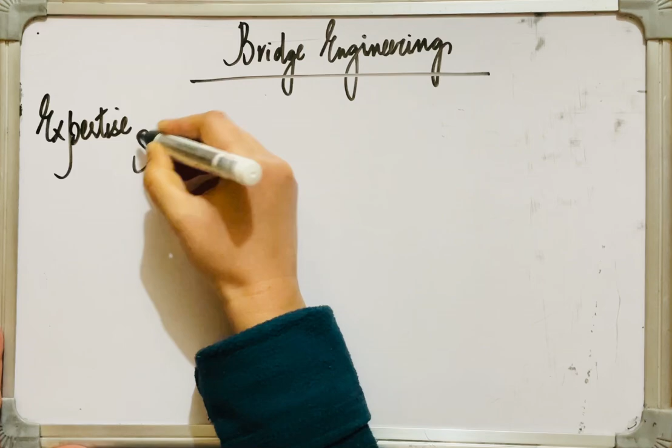From surveying to statistics, from runoff calculations to rubble masonry, from steel to structural concrete, and from materials to modern methods of construction.

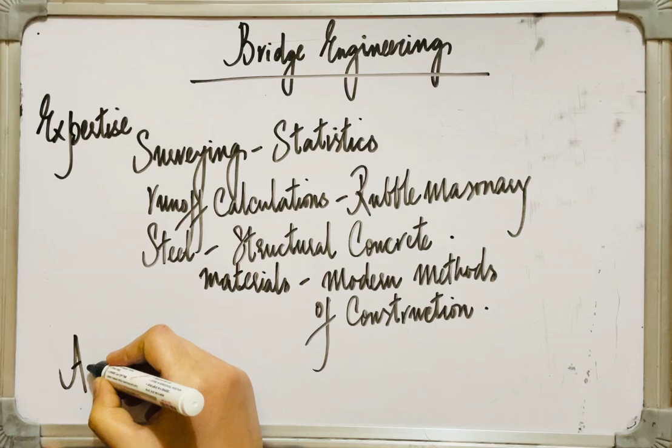A successful bridge engineer has to have an appreciation of both aesthetics and economics, besides ability in analysis and dexterity in design. Such is the wonderful and fascinating field of bridge engineering.

Before moving any further, let's study about the definition of a bridge. Let me rub it first. Definition of a bridge. What is a bridge?

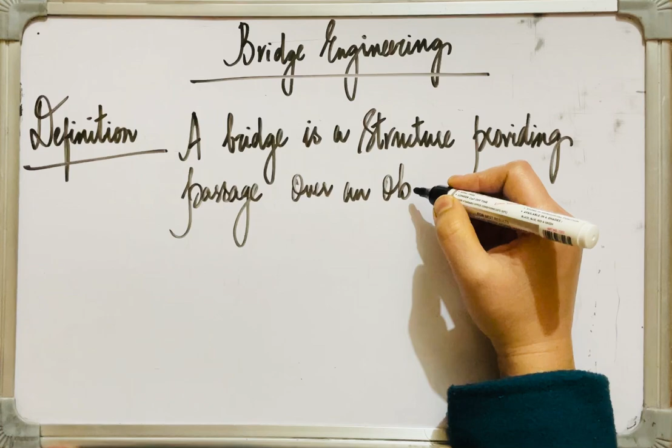A bridge is a structure providing passage over an obstacle without closing the way beneath. So a bridge is a structure which provides passage over an obstacle, but without closing the way beneath.

A bridge is a structure providing passage over an obstacle without closing the way beneath. This required passage may be for a road, for a railway, or pedestrians, or a canal, or even for a pipeline, etc. And the obstacle which needs to be crossed over may be a river, even a road, a railway, or a valley.

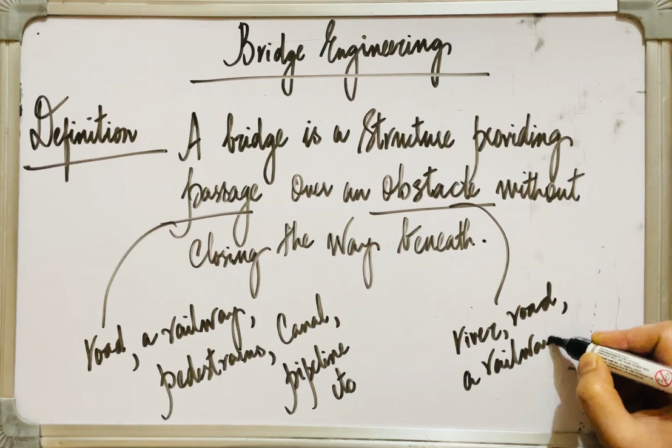So a bridge is a structure providing passage over an obstacle without closing the way beneath. This passage may be required for a road, a railway, a pedestrian, a canal, or a pipeline. And the obstacle that needs to be crossed may be a river, even a road, a railway, or a valley. Bridges are remarkable feats of engineering, composed of several parts that work in harmony to provide vital connections across obstacles such as rivers, valleys, or even roadways.

These structures are essential for transportation and infrastructure, and they consist of various components, each playing a unique role in ensuring the bridge's stability, load bearing capacity, and functionality.

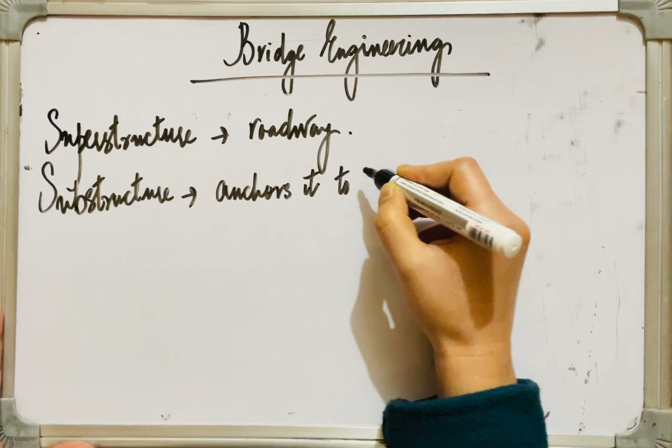Let me rub it first. From the superstructure of a bridge that supports the roadway, to the substructure of a bridge that anchors it to the ground, or the foundation of that particular bridge that transmits load to the bearing strata.

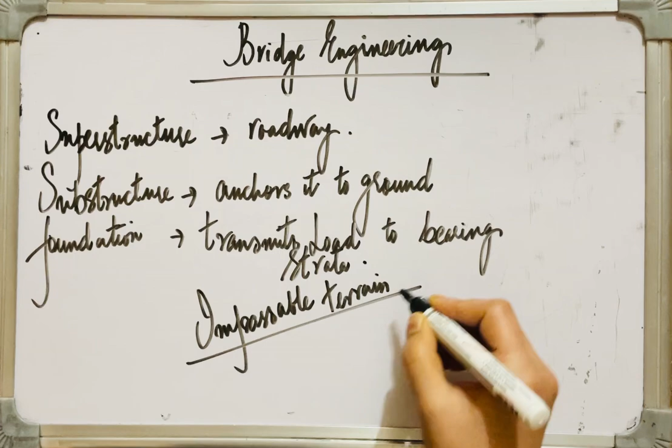Different parts of a bridge collectively form an intricate system that allows people and vehicles to traverse otherwise impassable terrains. And this bridge serves as a vital link, providing passage over rivers, valleys, or other impediments, allowing the smooth flow of people or vehicles from one side to the other.

So this was about the definition of bridge and importance of bridge. Before moving any further and studying about components of a bridge, we have to study one very important thing, that is span of a bridge. Let me rub it first.

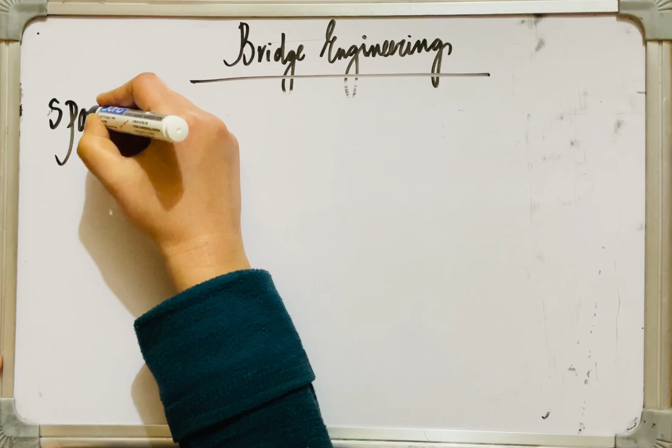Span of a bridge. In the field of bridge engineering, one of the most fundamental terms is this, span. Because the span of a bridge is a most fundamental term and it plays a crucial role in design, engineering, and overall performance of a bridge.

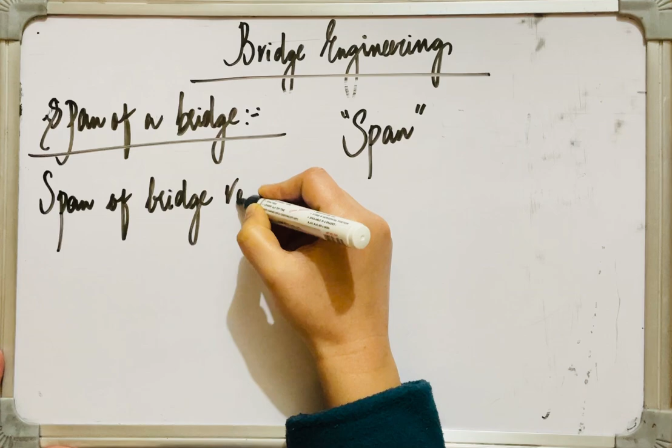What is the span? The span of a bridge refers to the distance between two supporting structures, such as piers and abutments, that hold up the bridge deck.

As already discussed, this span plays a crucial role in the design, engineering, and overall performance of a bridge. Understanding the span definition in bridge construction is essential for engineers, architects, and construction professionals, as it influences not only the bridge's structure but its functionality, cost, and durability as well.

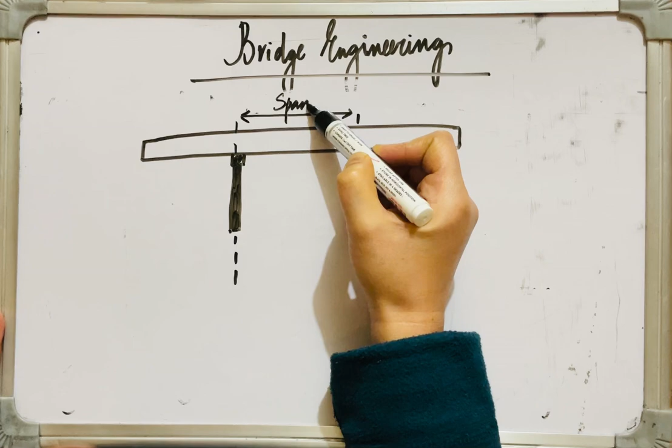Let me rub it first and draw a diagram to illustrate the concept of span in a bridge. If this is the bridge deck, and this is one pier, and this is the other pier, then the center to center distance is known as the span in a bridge.

Since this is the end, here will be the abutment, so this will be the end span, and this is also one of the end spans. The total distance, this span plus both of the end spans, is the length of the bridge, the total length of the bridge.

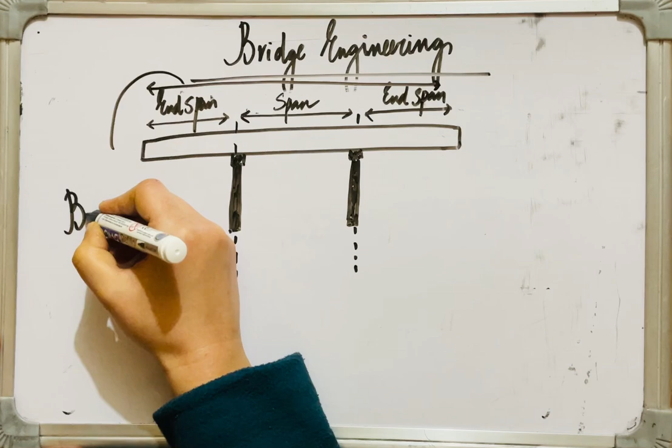To illustrate it in simple terms, the span of a bridge is a measurement of the distance between two supports that bear the load of the bridge, because these piers bear the load of the decking. The span is typically measured from the center of one support to the center of the next support, that is, the center to center distance between two adjacent piers or abutments. This differs for various bridges.

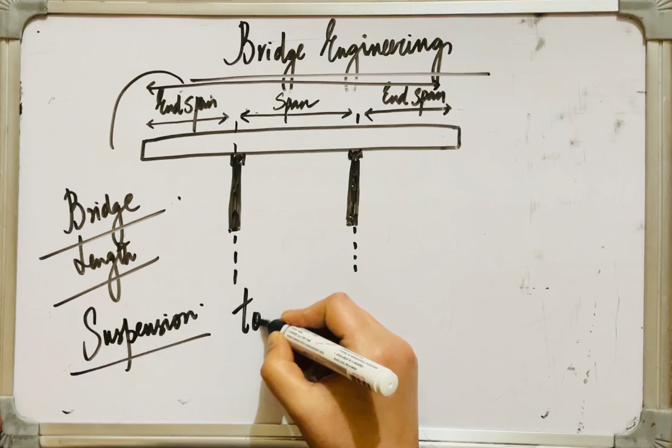For instance, if I take the case of a suspension bridge, the span is typically measured from the center of one support to the center of the next, but it depends on the type of bridge and varies from one to another. In a suspension bridge, the span is measured between two adjacent towers that hold up the cables.

In case of a beam bridge, the span is the distance between two piers that I already showed here. It's the distance between two piers or supports beneath that hold up the bridge deck. This is the deck of the bridge.

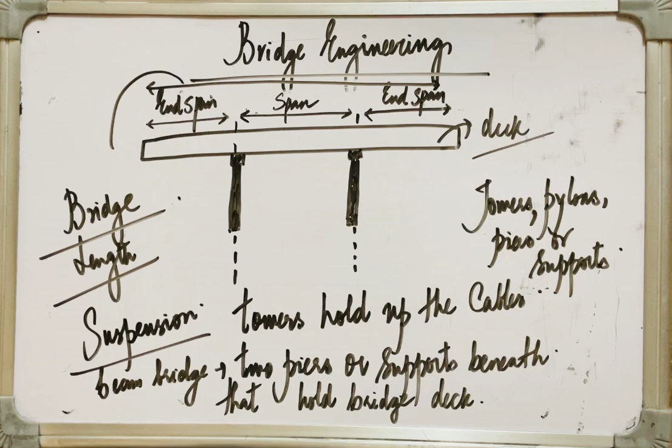Summarizing it further, in the simplest terms, span is the center to center distance between two adjacent towers or pylons, or piers or supports of a bridge, depending upon the type of bridge. That distance is known as the span of a bridge. So this was about the span, which is the most fundamental term used in bridge engineering.

Moving on, let's study the components of a bridge.

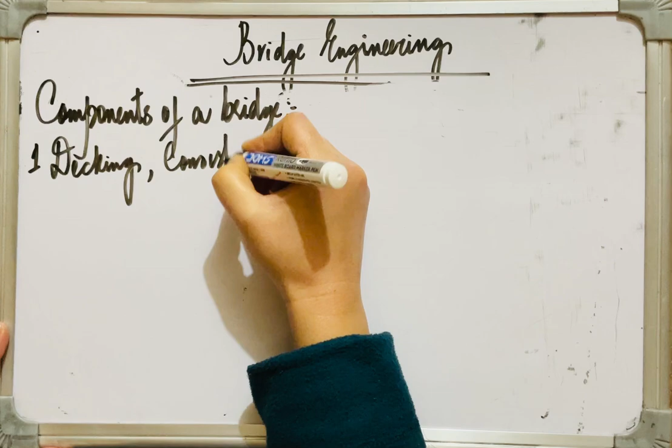The main components of a bridge are: first, decking, which consists of deck slab, girders, trusses, etc. Then we have bearings for the decking.

Then we have abutments and piers. Then foundation for the abutments and piers. Then river training works.

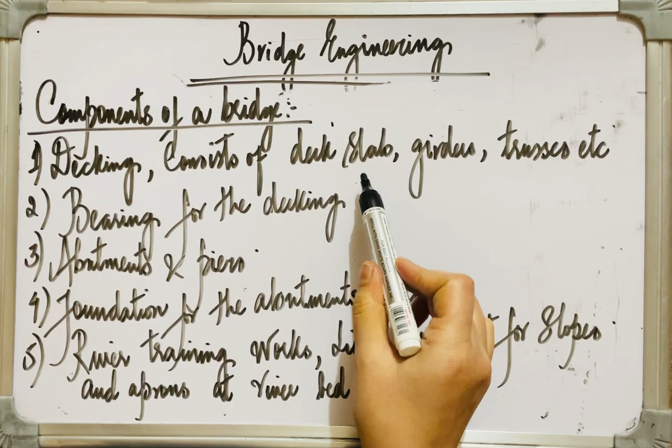Like revetment for slopes, and aprons at riverbed level, etc. There are more, but let me drop those for now. So the components of a bridge are: decking, which consists of a deck slab, girders, trusses, etc.; bearings for the decking; abutments and piers; foundations for the abutments and piers; and river training works like revetment for slopes and aprons at the bed level, etc.

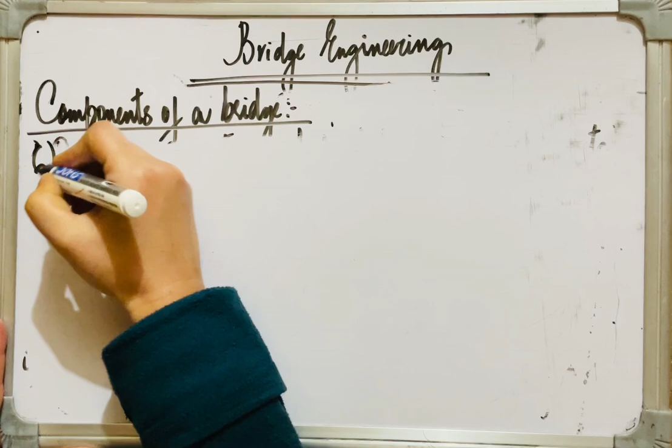We have more, let me drop it for now. And we have approaches to the bridge to connect it to the roads on either side. So number 6 is approaches to the bridge, and their function is to connect it to the road on both sides. Then we have handrails, parapets, guard stones, etc.

So these are the various components of a bridge. Let me repeat it again: decking, which consists of deck slab, girders, trusses, etc.; bearings for the decking; abutments and piers; foundation for the abutments and piers; river training works like revetment for slopes and aprons at the riverbed level; approaches to the bridge to connect it to the roads on either side; and handrails, parapets, and guard stones, etc.

So broadly speaking, there are 3 main components of a bridge. First is the superstructure, second is the foundation, and third is the substructure.

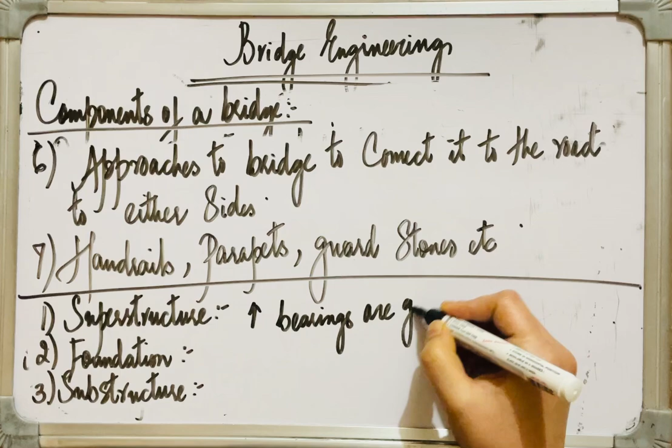Superstructure: the components above the level of bearings are grouped as superstructure. Foundation: the portion below the bed level of the river is known as foundation. Substructure: all those components which are below the level of bearing but above the level of foundation are known as substructure.

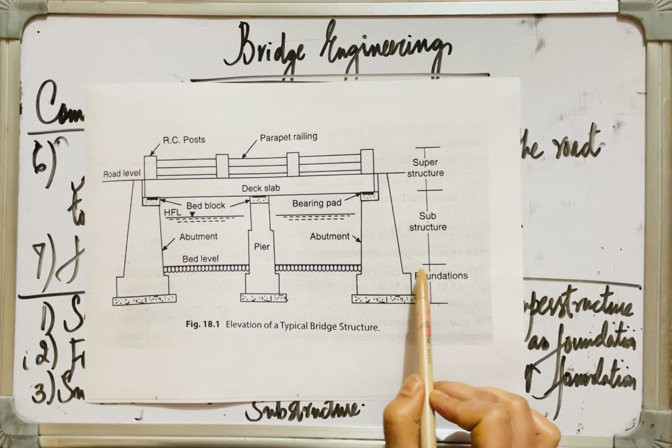We have many components of a bridge as told: decking, this is the decking; then we have bearings, these are the bearings; then abutments and piers, this is the abutment, the end supports and intermediate supports are known as piers. Then I have the foundation, below the bed level of the river over which we are building the bridge. Then the river training works, here, pitching for the embankment slopes and aprons, etc. Then handrails, parapet, etc., also shown.

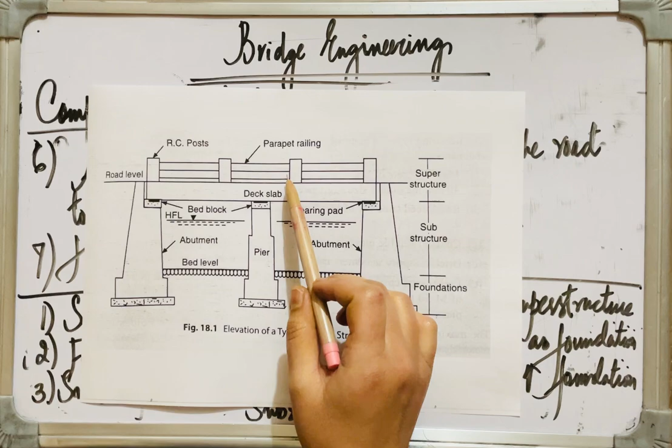Broadly, I categorize the components of a bridge in three parts: the superstructure, the foundation, and the substructure. All those components which are above the level of the bearings are grouped as superstructure. The foundation is below the bed level of the river, and all that portion which is below the bed level forms the foundation. All those components which are below the level of the bearing but above the level of the bed level of the river form the substructure. So this is foundation, this is substructure, and this is superstructure. In superstructure, we have decking, handrails, parapets, curb, approach slabs, etc.

Then we have bearings in substructure. We have bearings, abutments, piers, and below the bed level of the river, we have the foundation. So this is the typical elevation of a bridge structure, and these are the components of a bridge. Now let's study them in detail.

There are essentially three main components of a bridge: superstructure, foundation, and substructure. All those components which lie above the level of bearings are known as superstructure. That portion of the bridge which lies below the bed level of the river is known as foundation. And those components which fall below the level of bearings but above the level of foundation are grouped as substructure. Now let's study about them in some detail.

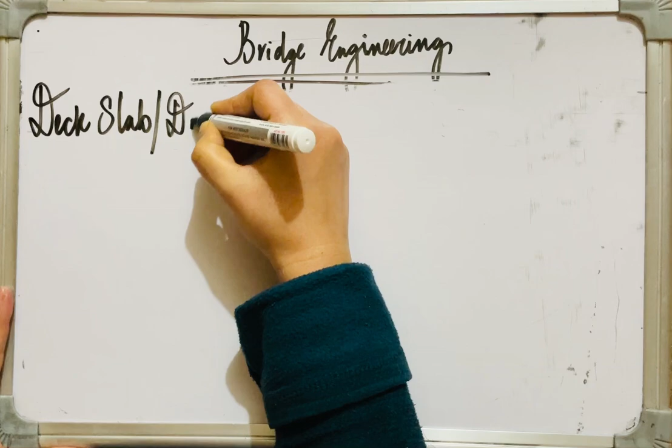First, we'll study about the deck slab or deck. In the figure, you can see this is the deck slab. This is the deck slab, right? In this figure also I'll show you, this is the deck slab. All right, this portion is the deck slab. What is deck slab?

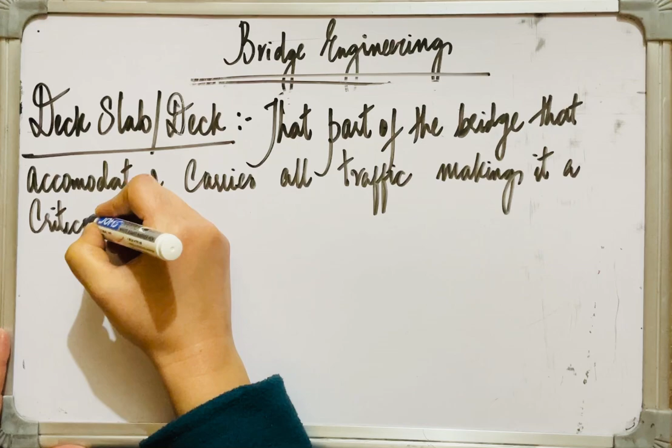Deck is that part of the bridge that accommodates and carries all traffic, making it a critical component for the safe passage of vehicles and pedestrians, be it vehicular traffic or pedestrian traffic. So the deck slab or the deck is that part of the bridge which accommodates and carries all that traffic, making it a critical component for the safe passage of vehicles and pedestrians.

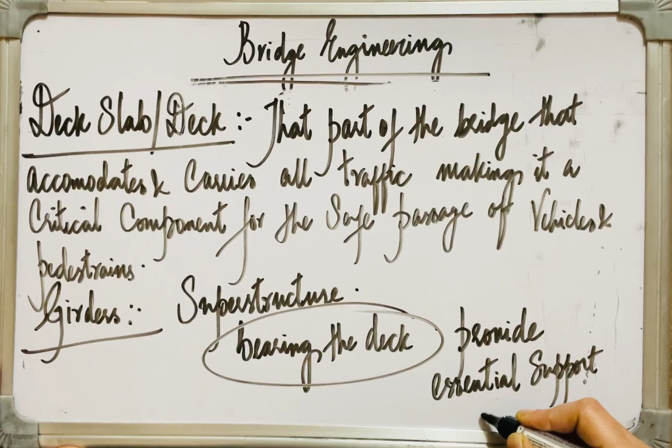Then let's study about girders or beams. Girder or beams are integral parts of the superstructure and are responsible for bearing the deck, bearing all the load that comes on the deck. And these structural elements bend along the span and provide essential support for the deck.

Moving on, let's study about bearings. What are bearings in a bridge? Bearings are provided in bridges to transmit the load from superstructure to substructure in such a manner that the bearing stresses induced in the substructure are within permissible limits.

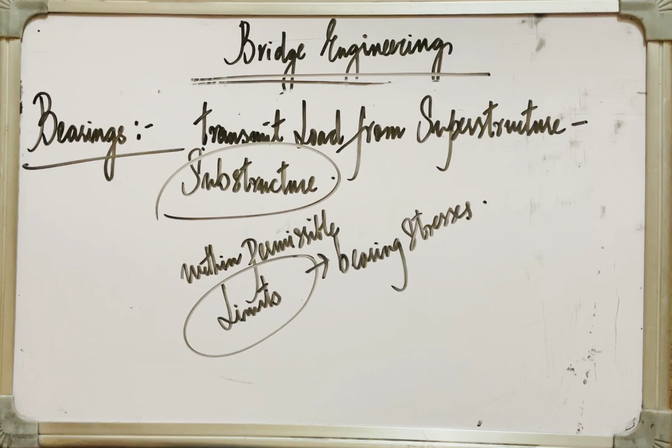Bearing stresses, all right. Bearings are provided in bridges to transmit load from superstructure to substructure, but in such a manner that the bearing stresses induced in the substructure are within permissible limits. And these bearings should also accommodate certain relative movements between the superstructure and the substructure.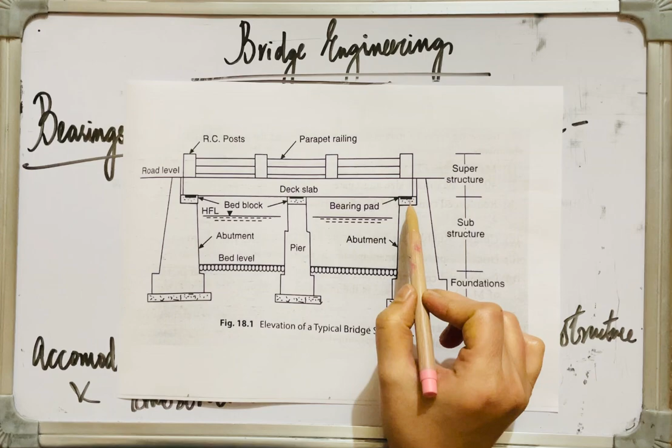And these bearings are provided at the top of the piers and the abutments. I will show you in the diagram. They are provided at the top of the abutments or the piers. This is the bearing pad, this is the bearing pad, and this is the bearing pad. In this diagram you can also see this is the bearing, this is the bearing, and these are provided at the top of abutments and piers.

They are provided at the top of piers and abutments.

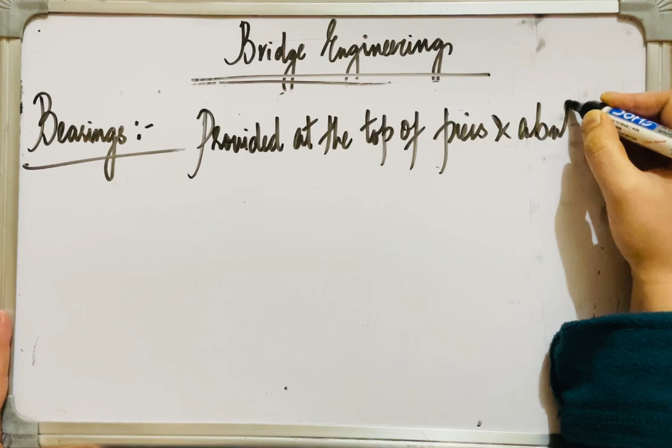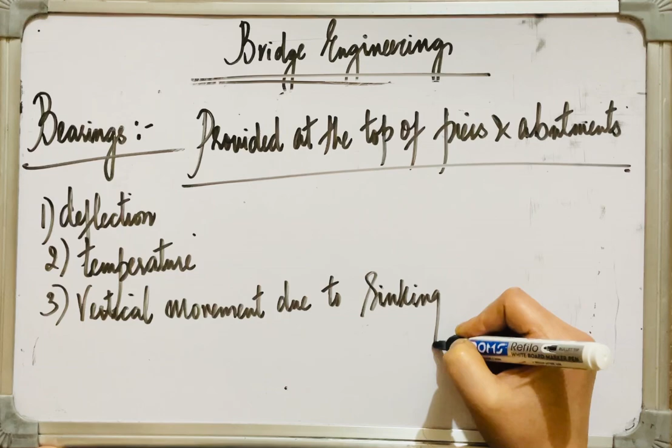Thus, the components which are provided over the supports of a bridge to accommodate the changes in the main girders - that changes may be due to deflection, they may be due to temperature, or vertical movement due to sinking of the supports, or shrinkage, or pre-stressing, or maybe creep, etc.

and to transmit the load from the superstructure to substructure in such a manner that the bearing stresses induced in the substructure are within permissible limits are known as bearings, and they typically provide a resting surface between bridge piers and the bridge deck, as you can see in the figure. These bearings are providing a resting surface between the bridge piers and the bridge deck.

Here you can also see these are the bearings, and they are providing a resting surface between the bridge deck and the bridge piers or abutments. As already discussed, they are there to transmit the load from the superstructure to substructure in such a manner that the bearing stresses induced in the substructure are within the permissible limits, and besides that they have to also accommodate certain relative movements between the superstructure and substructure.

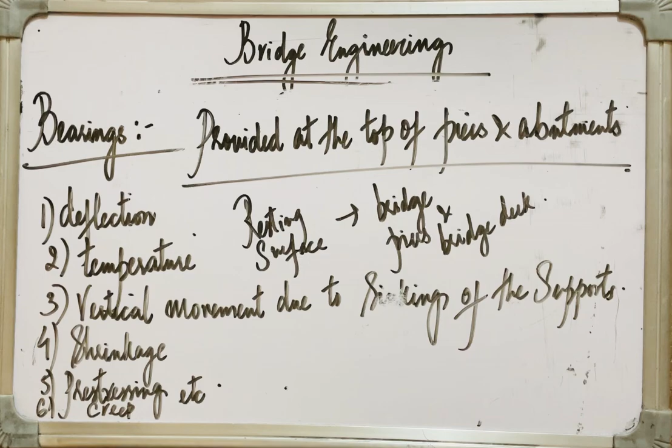These changes or relative movements in main girders of the decking may be due to deflection, temperature, vertical movements due to sinking of the supports, or shrinkage, pre-stressing, creep, etc. As already discussed, they provide the resting surface between the bridge piers and the bridge deck and are always provided at the top of piers and abutments. We have two types of bearings. Let us study about that as well.

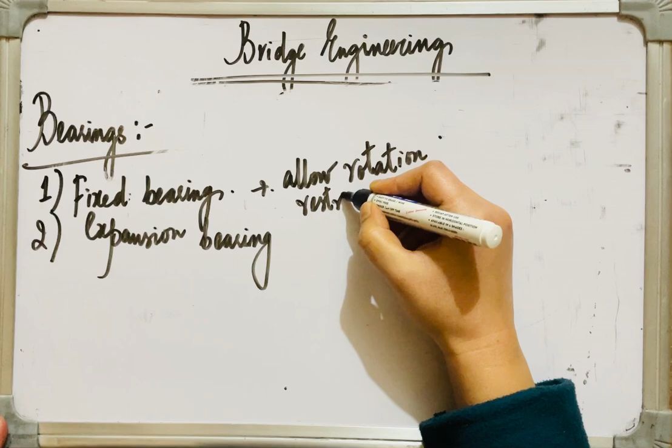We have two types of bearings, fixed bearing and expansion bearing. Fixed bearings allow rotation, but they restrict translation, thus preventing expansion.

They prevent expansion, but they allow rotation, whereas expansion bearings allow both rotation and longitudinal translation - that is, they allow both horizontal movements and rotations. So this was about the types of bearing, fixed bearings and expansion bearings. Fixed bearings allow rotation but restrict translation, hence they prevent expansion, whereas expansion bearings allow both rotation and longitudinal translation, that is, both horizontal movements and rotations.

Bearings form an important part of the bridge and are included among the most highly stressed elements in a bridge. They call for care in design, skill in execution, and regular maintenance. Faulty design or malfunctioning of the bearings have often contributed to the collapse of bridges.

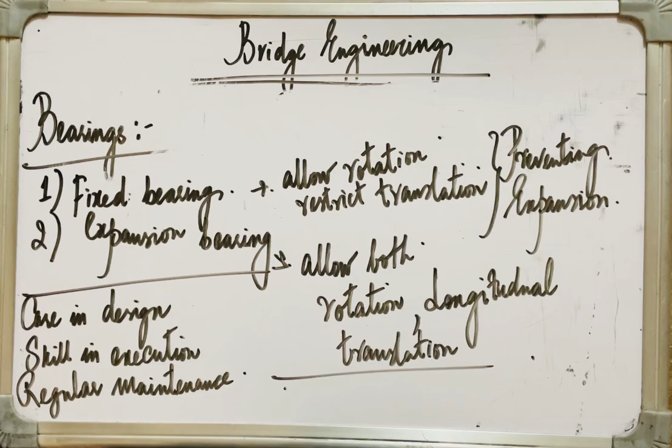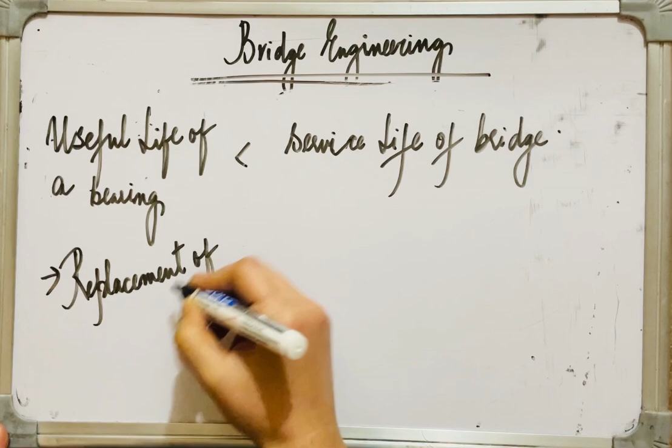Useful life of a bearing is generally less than the service life of the bridge. Hence, specific provisions should be made in the design of every new bridge for the bearing to be replaced by temporary jacking of the deck so as to permit a replacement by which we can change the bearings. If such a need arises, there must be some provision by which we can go for replacement of the bearing by way of temporary jacking of the deck.

The type of bearing to be used or selected in a particular bridge depends upon the type of structure, the type of the supports, and also the span length. What type of bearing we are going to use for any particular bridge depends upon the type of superstructure, the type of supports, and also the span length of that particular bridge. Then we go on selecting the suitable type of bearing for that particular bridge.

Elastomeric bridge bearings are the most common type of bearings we use in a bridge. These are the most popular type of bridge bearings used nowadays, and they are made of rubber and do not have any moving parts, because rubber itself allows movements in the bridge. So this was about bearings of a bridge. Let's move further and study about the pier and abutment caps.

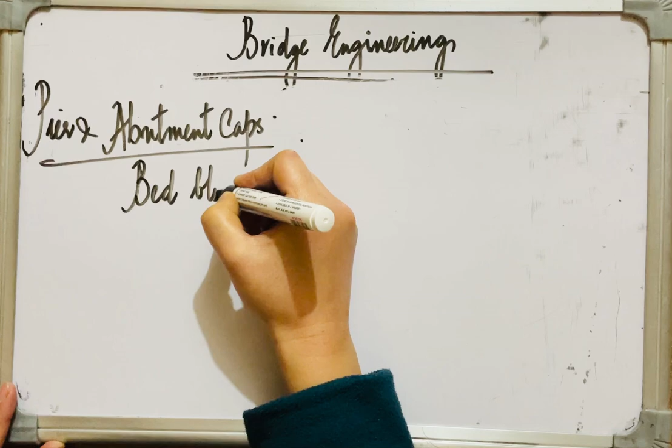Pier and abutment caps, also known as bed block or bridge seat, are reinforced concrete bed blocks resting over the top of the pier or the abutment. So what is a pier and abutment cap? These are also known as bed blocks or bridge seats, and these are essentially reinforced concrete bed blocks which rest over the top of piers and abutments.

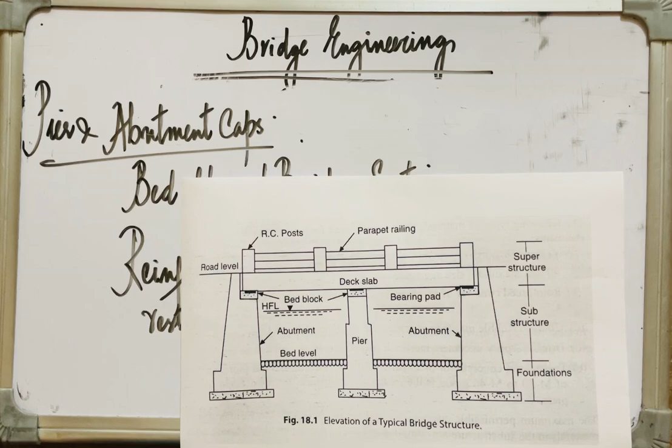In the figure you can see these are the pier or abutment caps, and this is a reinforced concrete bed block which rests over the top of piers or abutments, also known as bed block or bridge seat. Now, what is their function? It provides the immediate bearing surface for the support of the superstructure at the pier or abutment location and disperses the strip loads from the bearings to the substructure more evenly. Let me write it down.

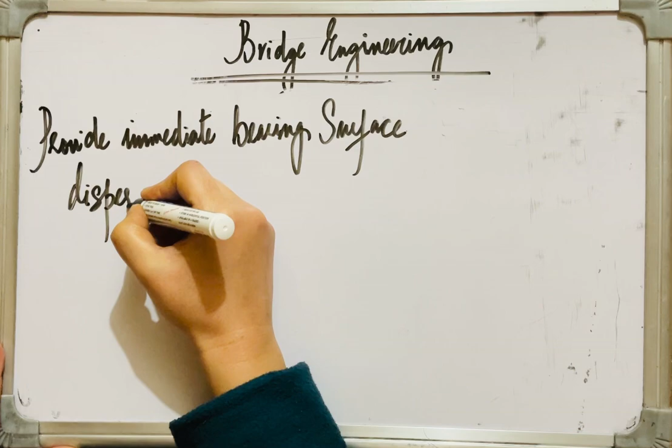So we're studying about the pier or abutment caps, and what is their function? They provide immediate bearing surface for the support of the superstructure at the pier or abutment location and disperse strip loads from the bearings to the substructure more evenly.

In the diagram you can see this is the deck slab, these are the bearings, and this is the bed block or abutment cap or bridge seat. Their role is essentially that it provides an immediate bearing surface for the strip loads from the superstructure to disperse more evenly into the substructure. So this is about the role or function of the pier or abutment cap.

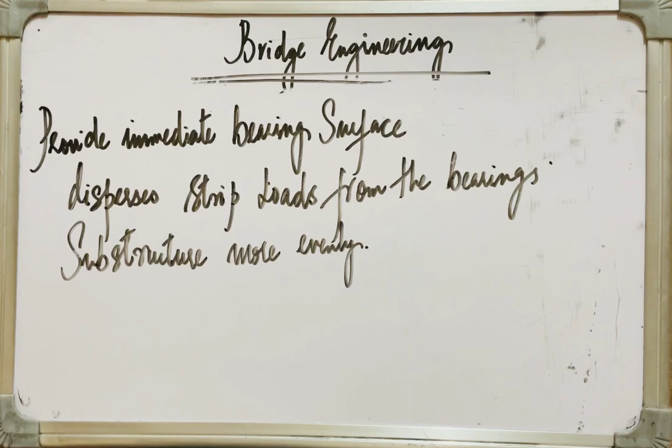This pier cap should cover the entire area of the top of the pier or the abutment. Besides that, it should also project 75 mm beyond the pier dimensions. If this is a pier, and this is the bed block, a reinforced concrete block, there must be some offset of about 75 mm beyond the dimensions of the pier or abutment, and this is essentially to prevent rainwater from dripping over the sides of the pier or abutment.

Let me illustrate it once again: the pier cap should cover the entire area of the top of the pier and should project 75 mm beyond the pier dimension, and this offset prevents rainwater from dripping down the sides and ends of the pier, and also improves the appearance of the pier.

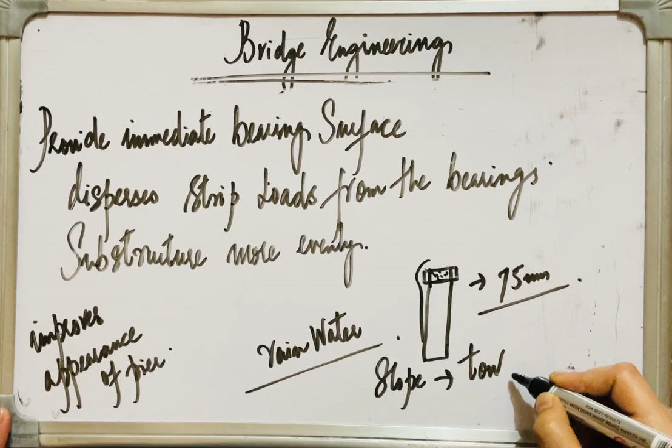And the top of the pier cap, except at the bearings, should have a suitable slope towards the outside. But except at the position where there are bearings, this pier cap or bed block or bridge seat should have a suitable slope towards outside. So this was about the pier and abutment caps. Moving on, let's study about abutments.

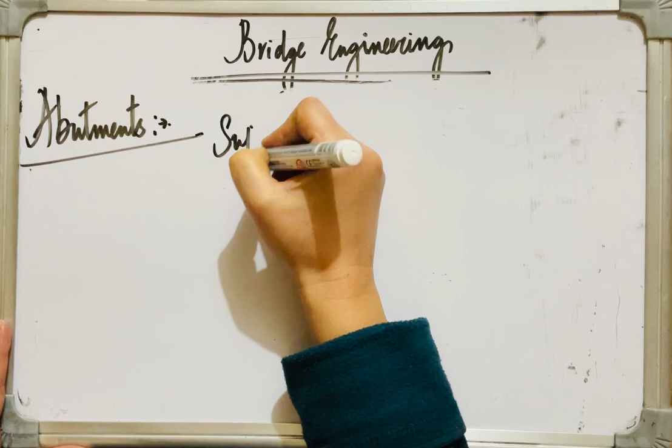Abutments. An abutment is the substructure which supports one terminus or one end of the superstructure of a bridge and at the same time laterally supports the embankment. It is that part of the structure of a bridge that supports one terminus or one end of the superstructure, and at the same time it has another function, that it laterally...

...supports the embankment as well, and that embankment serves as an approach to the bridge. In the diagram you can see this is an abutment, and an abutment is that part of the substructure which supports one terminus or one end of the superstructure, and at the same time it laterally supports the embankment, which serves as an approach to that particular bridge.

And for a river bridge, the abutment also protects the embankment from the scour of the stream. You must know that in case of a river bridge, the abutment also prevents the embankment from the scour of the stream.

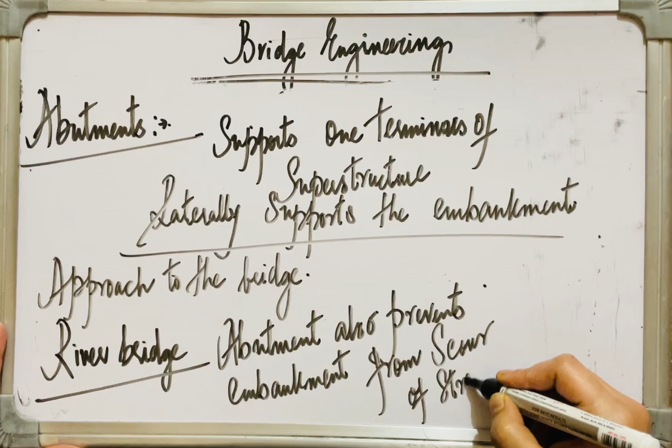That part of the substructure which supports one terminus or end of the superstructure, and besides that also laterally supports the embankment, is known as the abutment or the end support of the bridge. In case of a river bridge, these abutments also prevent the embankment from the scour of the stream. These bridge abutments can be made of masonry.

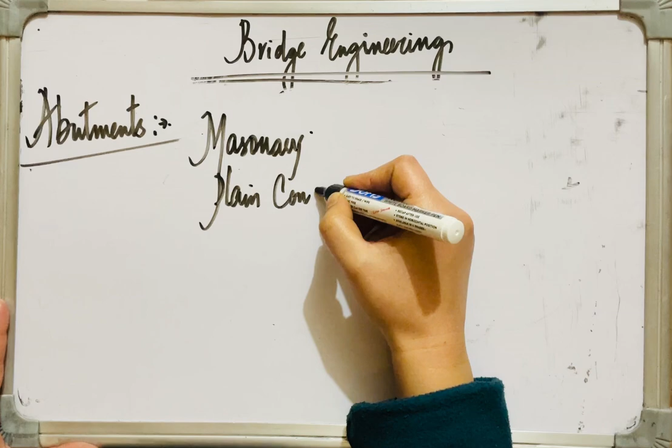Abutments can be made of masonry, or plain concrete, or they may also be made of reinforced concrete.

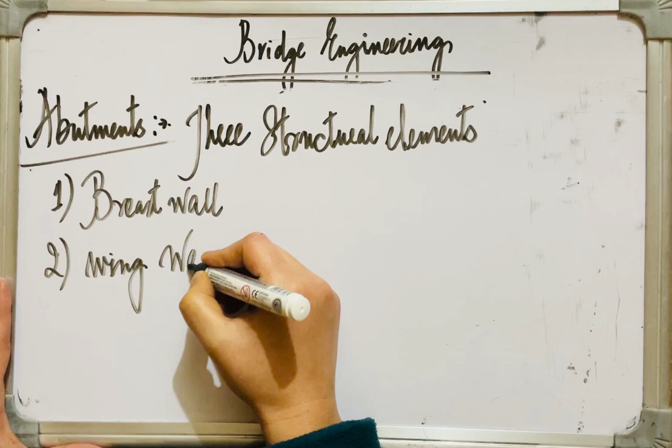This abutment generally consists of three distinct structural elements. Let's study about that: the first one is the breast wall, the second one is the wing wall, and the third one is the back wall or the dirt wall.

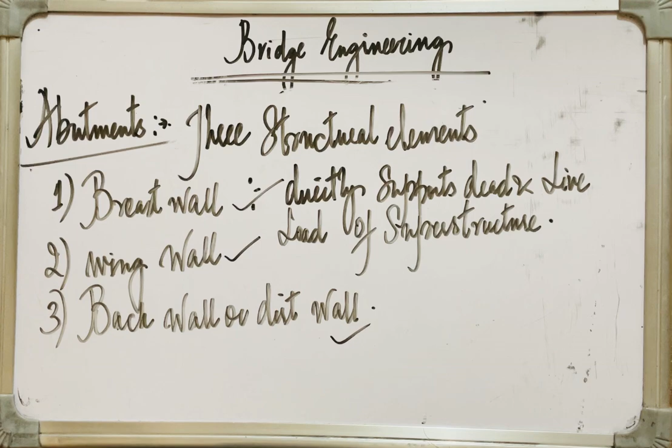What is the breast wall? Breast wall is that particular component or structural element of an abutment which directly supports the dead and live loads of the superstructure, and retains the filling of the embankment on its rear side.

There are essentially three structural distinct components of an abutment: breast wall, wing wall, and dirt wall. We're studying about breast wall. It is that particular element which directly supports the dead and live loads of the superstructure, and besides that it retains the filling of the embankment on its rear side or back side. Then we have the wing wall.

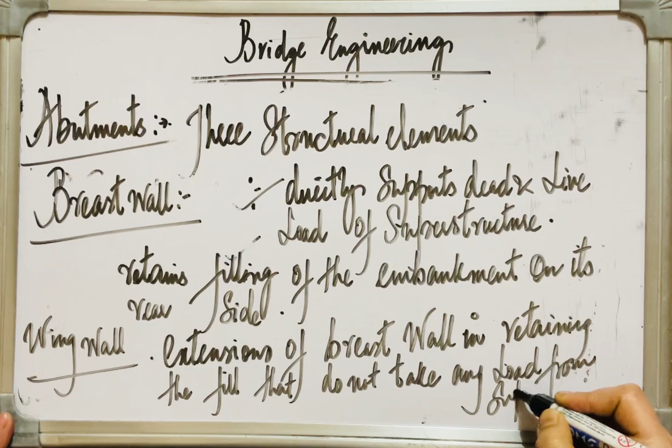Wing wall acts as extensions of the breast wall. These are the extensions of the breast wall in retaining the fill, but they do not take any loads from the superstructure.

So the breast wall is that component which directly supports the dead and live loads of the superstructure. Besides that, it also retains the filling of the embankment on its rear side or back side. These wing walls are the extensions of the breast wall in retaining the fill, but they do not take any loads, be it dead loads or live loads, from the superstructure.

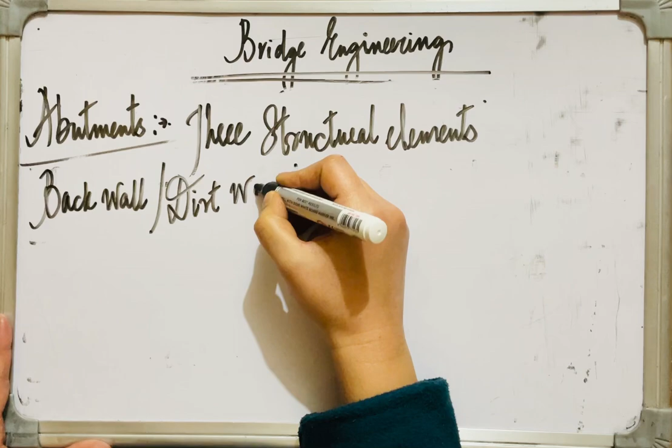The third structural element of an abutment is the back wall or dirt wall. Back wall, also known as dirt wall, is a small retaining wall just behind the bridge seat. What is a bridge seat? The bed block or the reinforced concrete block on abutment is known as a bridge seat.

So a small retaining wall just behind the bridge seat is known as the dirt wall, and its function is that it prevents the flow of backfill material from fill to bridge seat. So this was about the three distinct structural elements of an abutment: the breast wall, the wing wall, and the back wall or dirt wall.

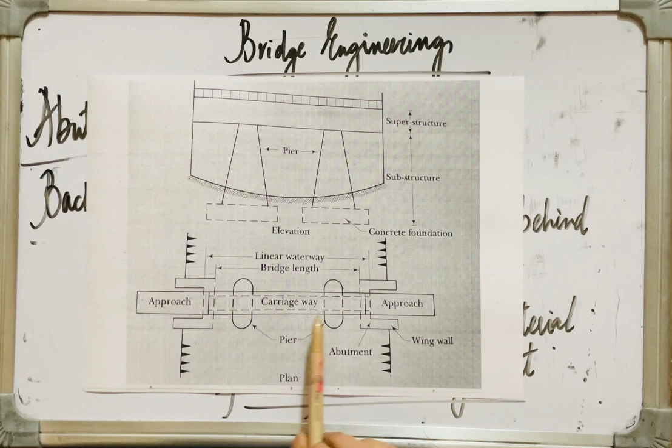I'll show you here in the diagram. So these are the abutments. This is the approach of a bridge. This is a bridge, this is its carriageway. This is the abutment, it has three distinct structural elements. This one is the breast wall, which has two functions: it takes both dead as well as live loads from the superstructure, and besides that it also retains the fill on its rear side or back side. And these are the wing walls.

Their function is to act as extensions of the breast wall, retaining the fill of the backfill material, but they do not take any loads from the superstructure.

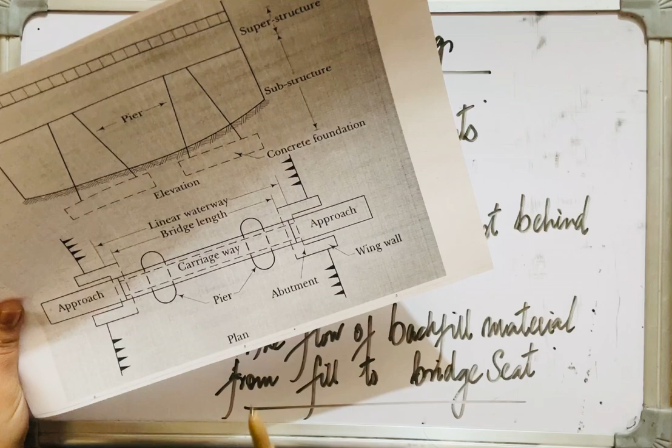Just behind here, not shown in the diagram, there is a dirt wall which lies just beneath the bridge, behind the bridge seat. This small retaining wall is known as the dirt wall or back wall, and its function is to prevent material from flowing from the fill to the bridge seat. This is the bridge seat, and this is the breast wall. Taking the entire abutment assembly: this is the breast wall, these are the wing walls, and just behind the bridge seat is the dirt wall, whose function is to prevent the flow of material from the fill to the bridge seat.

This was about the abutment. Abutments are the end supports, essential parts of the substructure, whose one terminus supports the superstructure and the other terminus serves to support the embankment, which serves as an approach to the bridge, to its carriageway, to its deck or deck slab.

Moving on, piers. What are piers? Piers are structures located at the end of bridge spans, not at the end of bridge length. The supports at the end of the bridge length are known as abutments, but the structures located at the end of bridge span, which we already discussed, are known as piers.

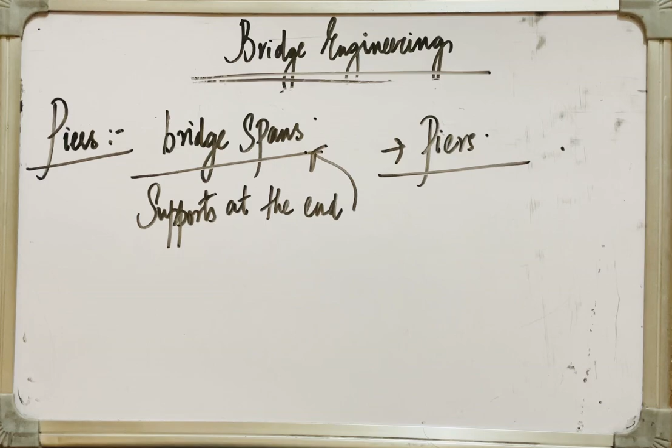So those supports which are at the end of bridge spans are known as piers. Their function is twofold. Piers are structures located at the end of the bridge spans, located at intermediate points between the end supports known as abutments. First, piers transfer vertical loads to the foundation.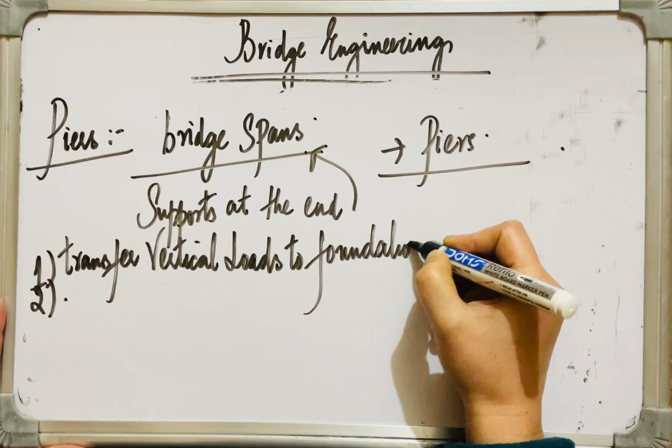Also, their second role is that they resist all the horizontal and transverse forces acting on the bridge. So those supports which lie at the end of the bridge spans are known as piers, and they have two functions: first, they transfer the vertical loads to the foundation, and second, they resist all the horizontal and transverse forces acting on the bridge.

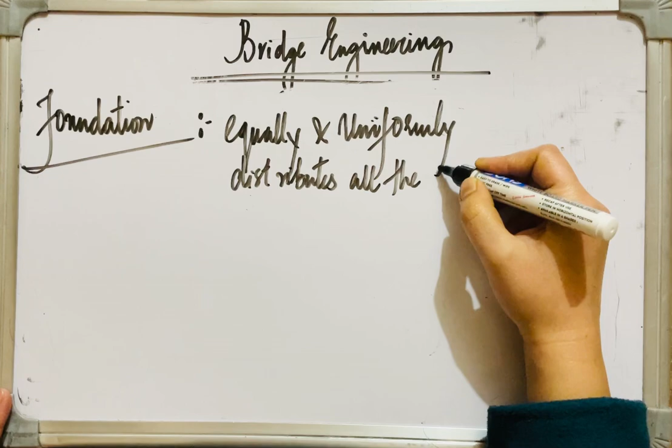Moving on, let's study the foundation. Foundations are required to distribute the loads uniformly and equally to the bearing strata. That means the purpose of a foundation in a bridge is to equally and uniformly distribute all the load of the bridge down to the bearing strata or the ground beneath.

The design of bridge foundations in general should conform to the standard specifications and code of practice for bridges as prescribed by the IRC Bridge Code, Indian Roads Congress Bridge Code. This is the most important component of a bridge, whose function is to equally and uniformly distribute all the load of the bridge to the bearing strata below, and the design should conform to the standards laid by the Indian Roads Congress in their bridge code.

Moving on, handrails and parapets. Parapets and handrails are provided on bridges as a protective measure, to keep bridge users from falling to the depth or the sides of the bridge.

While these parapet walls would be adequate for culverts or small bridges, in case of long bridges we generally use handrails. Besides that, these handrails are prominently visible in the neighborhood, and their design should be such as to enhance the aesthetics of the bridge.

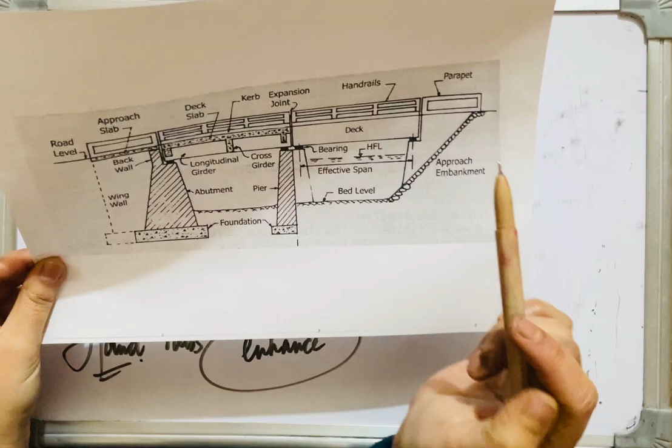So this was about the handrails and the parapet. In the diagram, this is the railing. I'll also show you these are the handrails and this is the parapet on the approach slab. Their function is to act as a protective measure to keep the bridge user safe from falling to the depth or the sides of the bridge.

Moving on, approach slab.

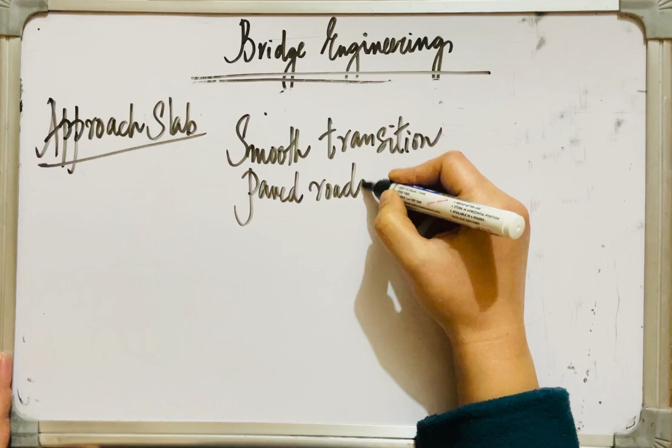Approach slab. What is approach slab? A reinforced concrete approach slab is usually provided on either side of a concrete bridge to function as a smooth transition between the paved roadway and the riding surface of the bridge. So this approach slab is a reinforced concrete slab which is provided on either sides of a concrete bridge, and its function is that it acts as a smooth transition between the paved roadway and the riding surface of the bridge. The slab also serves to minimize the bumps to traffic.

Bumps to traffic are also minimized by this approach slab. Let me show you here in the diagram. This is the approach slab, a reinforced concrete slab which usually acts as a smooth transition between the paved roadway and the riding surface of the bridge.

The last component, river training works. In case of major bridges across wide rivers, river training works are used. River bridges which are long and major and which are made over wide rivers, there we have to use river training works such as guide bunds, or maybe spurs or groins.

And protection works to embankment, etc. So in case of major bridges which are made across wide rivers, river training works such as guide bunds, spurs or groins, or various other protection works to embankments are required.

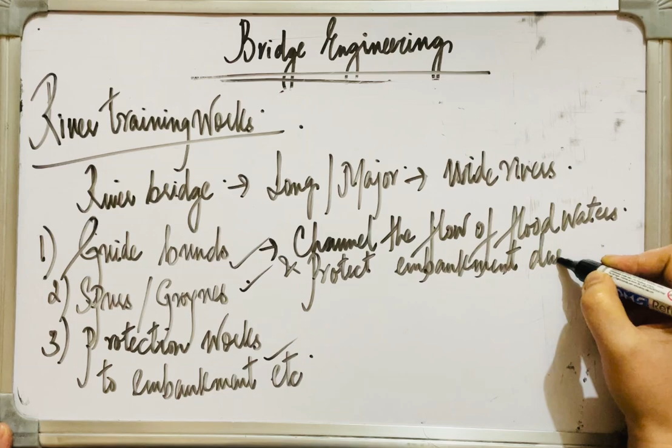And these guide bunds are required. Guide bunds are provided to channel the flow of flood waters, and they also protect the embankment during floods. So guide bunds channel the flow of flood waters and also provide protection to the embankments during the time of floods.

These spurs or groins are provided for attracting, deflecting, or repelling the flow of a channel. Let me rub it first and write it down. We need various river training works when building long bridges over wide rivers, and the various works provided are guide bunds, spurs or groins, and various other embankment protection works. The first one, guide bunds, are provided to channel the flow of flood waters. Besides that, they also provide protection during the time of floods. Spurs or groins,

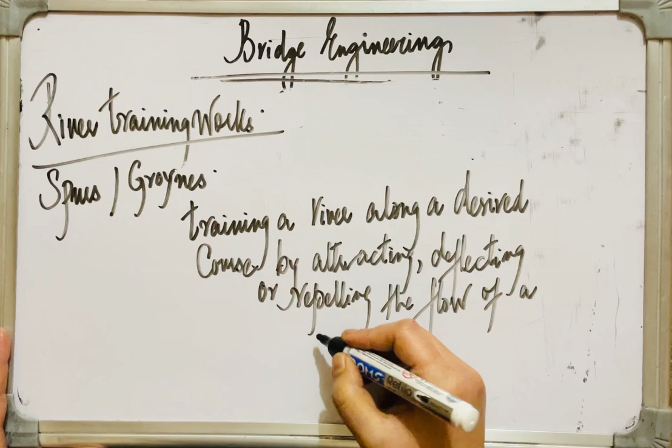they are provided for training the river along a desired course, by attracting, deflecting, or repelling the flow of a channel. So these spurs or groins are provided for training the river along a desired course by attracting, deflecting or repelling the flow of a channel.

And approach embankments may also require protection of slopes by way of pitching. We do slope protection of embankments by stone pitching. Besides that, we also provide an apron or launching apron at the bed level.

So these are the various river training works that we have to go for while building long bridges over wide rivers. And these guide bunds may be straight or elliptical. The usual shape is like this, with a circular head and tail.

And the apron, which we studied, is also known as launching apron. That is provided at the toe of the riverside slope for protection of the toe from the scour of the stream. So this was about the launching apron, the guide bunds, the spurs or the groins.

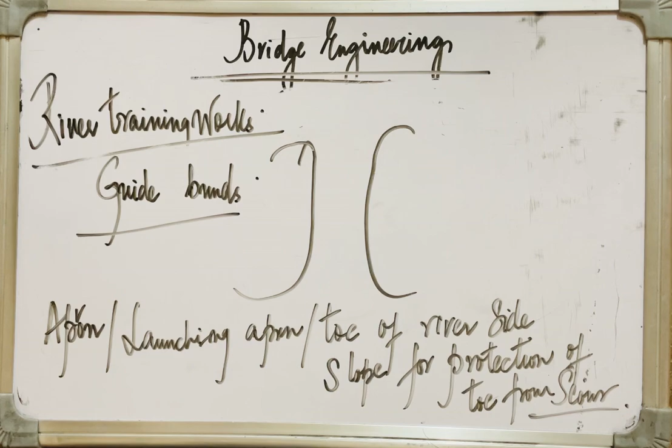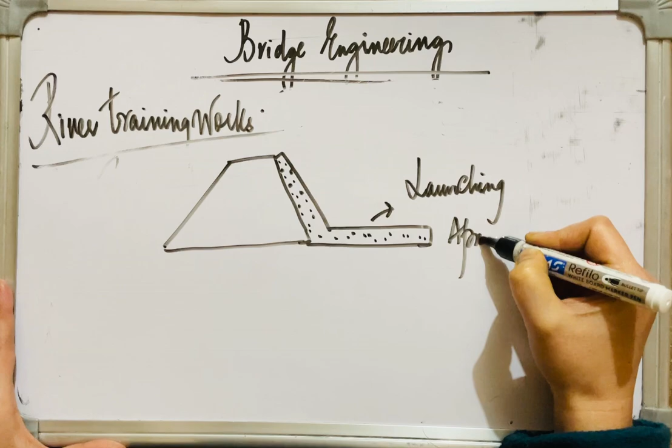Let me show you one diagram. If this is an embankment, this is the stone pitching. We pitch the slope of the embankment for its protection. And this is the launching apron. This is the HFL. This is the pitching. So this is the stone pitching, this is the launching apron, and this is the pitching.

As already discussed, an apron, also known as the launching apron, is provided at the toe of the riverside slope for the protection of the toe against scour of the stream or the river. And stone pitching is also provided for the protection of the slope of the embankment. So this was about various components of a bridge. With this, I conclude this video lecture. Thank you for watching.